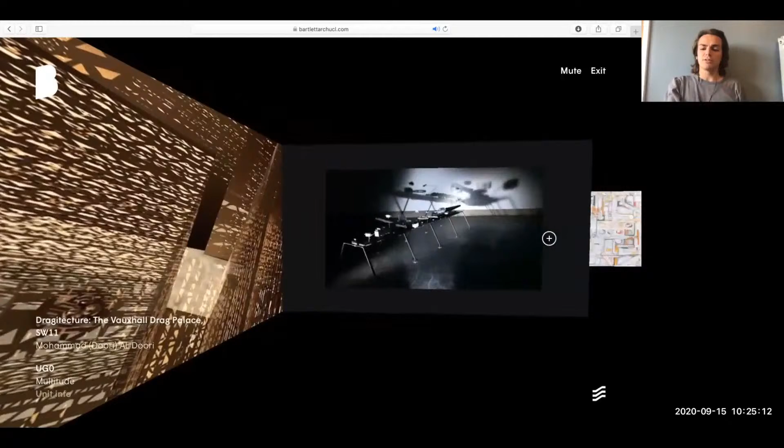I'm going to start with UG0 because it's the lowest number. UG0 is one of the older units, having been around the Bartlett for, I think, a thousand years maybe. This year they've been looking at multitudes, rediscovering neglected space in London with a real social focus of architecture as a social condenser, and the multitudes that presents. There's some really fantastic work.

I'd like to start with this work by Temi, which addresses something really contemporary and relevant this year: Black British history, and how it's overlooked in a lot of our museums. A lot of our galleries are very whitewashed, and she's hoping to redress that balance in SE15 in Peckham, an area known as London's Little Lagos.

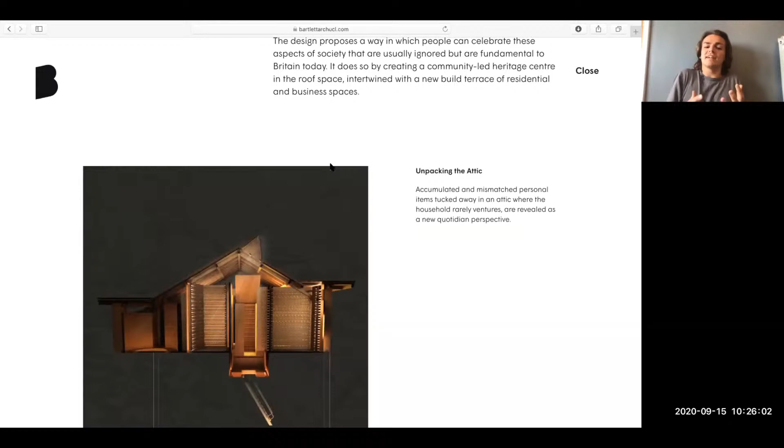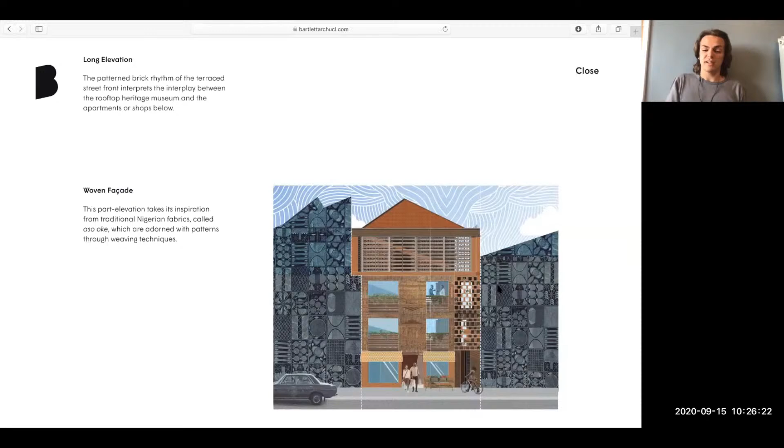She's thinking about the attic space, how in a house it becomes a sort of personal archive. That was her first project for the year, about the hoarding of things, memories and experiences that go on in people's attics, and how that interesting typology could be used to create, in London's Little Lagos, a community-led heritage centre to redress how Black British history is overlooked in a lot of our contemporary museums.

I just love these drawings. I think they're really fantastic and clear. It's immediately clear what we're talking about. The culture comes through these drawings, and I think they're just fantastic. It's a really lovely project.

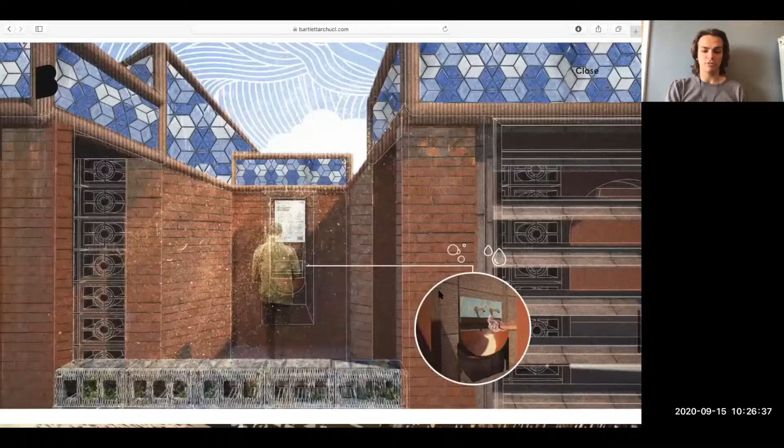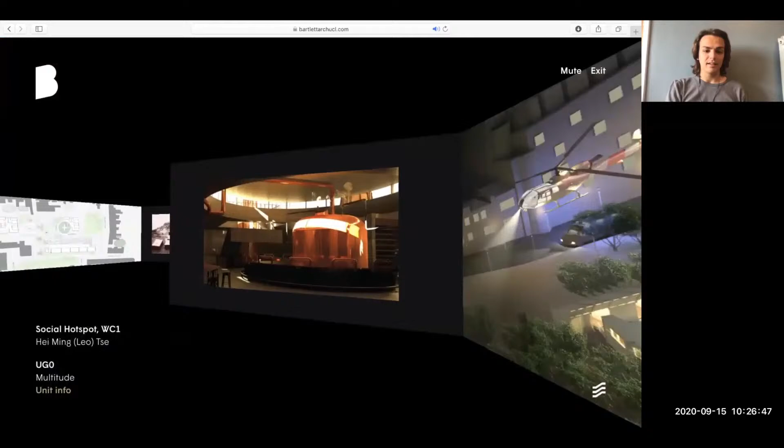Next, I'd like to look at Peter's work. His project, Recasting Holloway, is based at Holloway Women's Prison. He's read the Baroness Corston 2007 report, which looked into different ways of rehabilitating women who've committed crimes, and the shortcomings of our women's prison system. There are some really interesting facts in here that I had no idea about.

Women spend an average of 3 months served in prison, and that means their houses and their lives get destroyed and taken away from them. Then they only have 3 months before they're spat back out into the world with nothing again, such short sentences that quite often they don't even reach the rehabilitative programs available to men in prison.

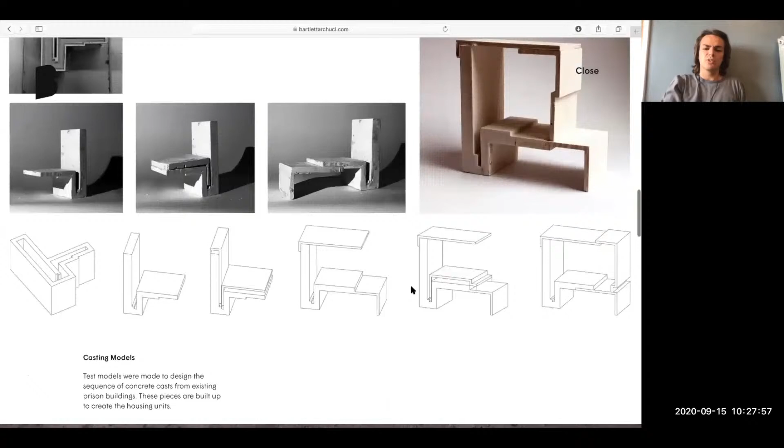He's thinking about how you can take hold of the former women's prison site in Holloway, which was sold off by Mr. Bean lookalike runner-up George Osborne, and is being turned into a very conventional housing development. He's thinking about keeping it as a site which could help serve as part of the penal system in a different way to how the women's prison did.

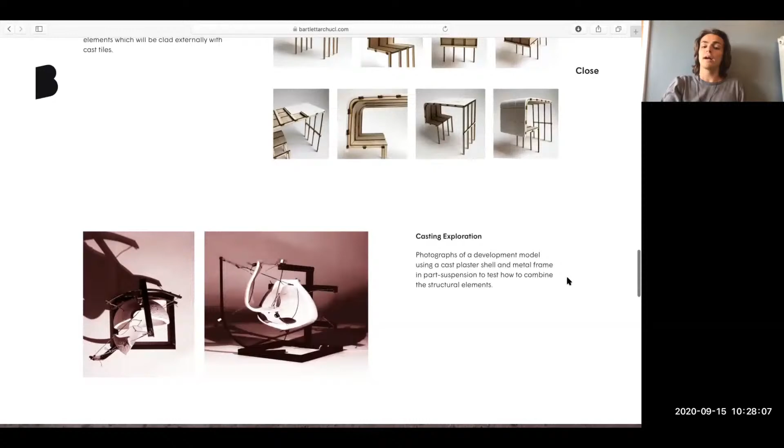As you can see, he's developed his ideas through model making. It's resulted in this really lovely, really clear model where you've got this mixture of social housing and rehabilitative facilities for these women, so they can come out of whatever situation drove them to crime and be safe in this safe space.

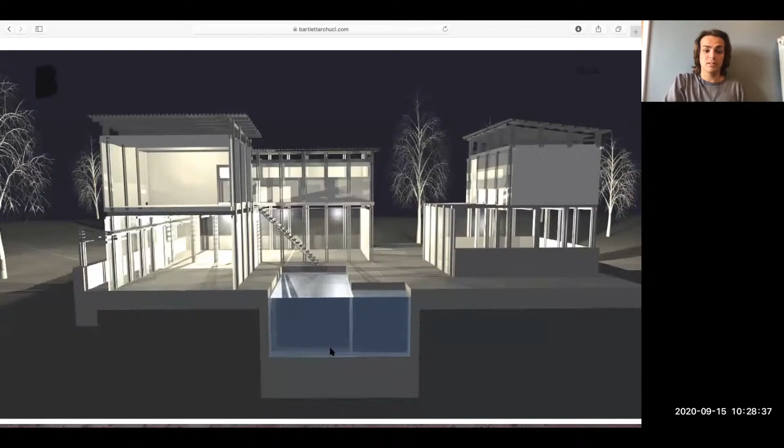I think it's a really fantastic project that addresses an issue that's maybe not talked about so much. We don't talk about women's prisons so much in this country, and I think Peter's tackled it in a really clever way.

Next up, I'd like to look at Andre Dinu's work, which is a social housing project down in Elephant and Castle — not Elephant and Castle, really, it's down in Walworth, where the Heygate estate used to be.

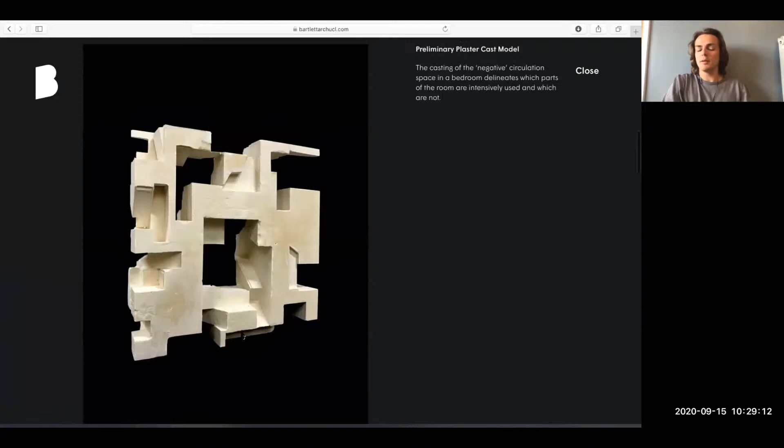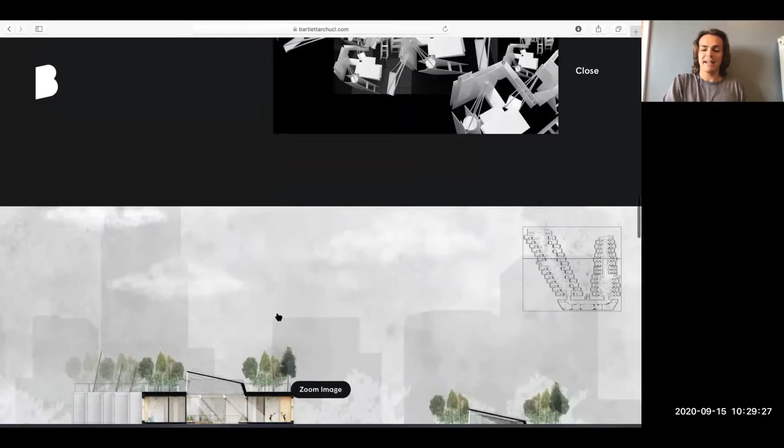I've made fun of George Osborne, I'll make fun of Labour and the Lib Dems now. The Labour and Liberal Democrat council back in 2004 sent out a survey to residents of the Heygate estate asking if they'd like improvements to their kitchen, and obviously they said yes. They took that survey and used it as an excuse to demolish this estate and destroy this community, scattering it across London. What was 1,214 social houses has been replaced by 82 social houses and swathes of Ministry of Sound adjacent private student halls, and very exclusive, not community-focused design that's tearing Walworth away from Walworth and bringing it more towards central London living.

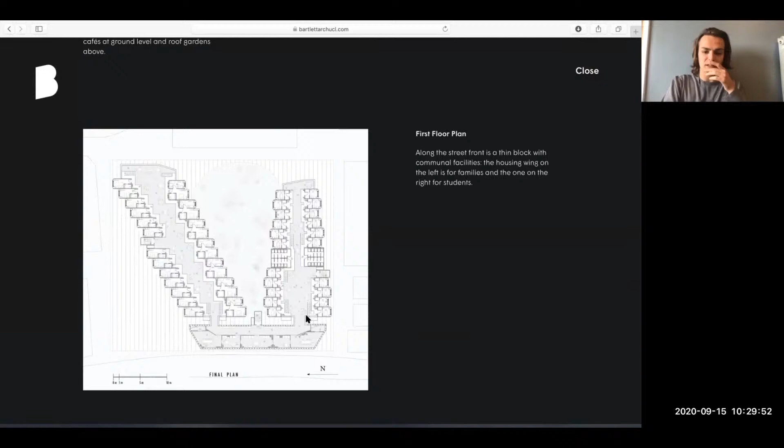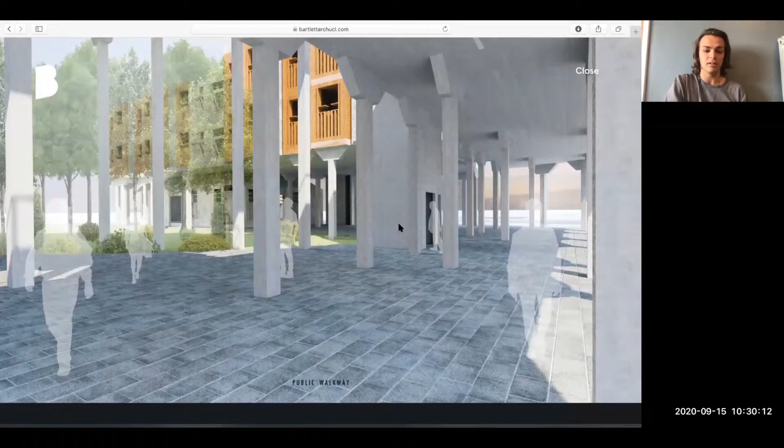What Andre's done is designed a really nice combined social housing and student housing development. I think this plan is quite nice, quite lovely, quite clear, and tackled a really important issue. I think the destruction of the Heygate estate was one of the greatest mistakes in London planning, done in the worst way it could possibly have been done. She's just working to redress that balance. I think it's a really great place to start a project.

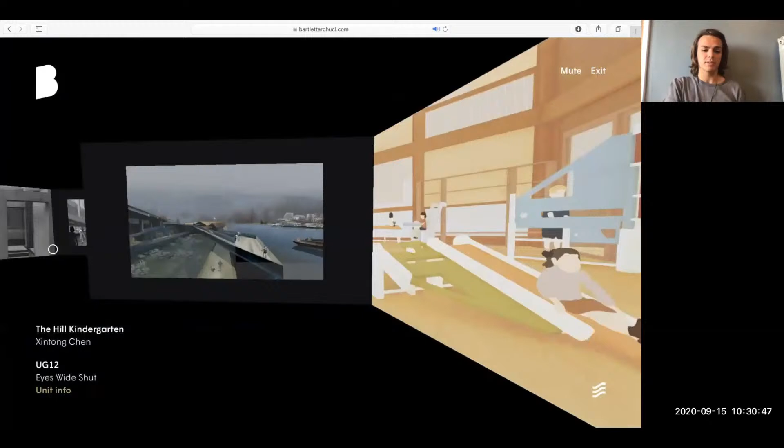I will go all the way up to the other end now, to Unit 12. Unit 12 started the year designing with their eyes wide shut to Prague, going there without any knowledge, with just their preconceptions. Then in the second half of the year, they turned that around on its head and designed very socially aware, very contextually aware buildings for Prague, as much as they possibly could. So it took completely the opposite approach, and it's come out with some really interesting buildings.

I want to start with Kirsty's work, because there's a different kind of accessibility, I suppose, for potential prospective students, or students coming from first year to second year at the Bartlett. I think the Bartlett can seem like a bit of a CAD and render farm, and this is just a really nice example of some hand-drawn work that I think is really superbly clear.

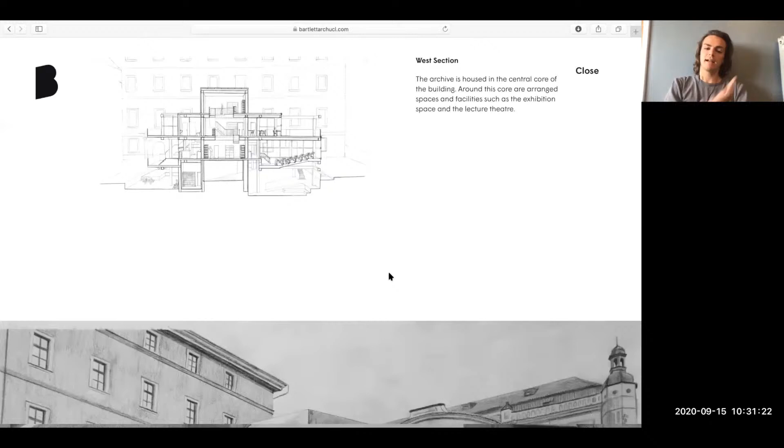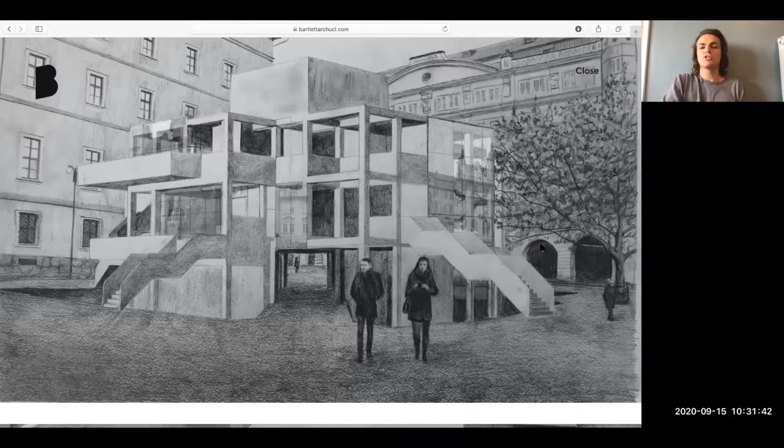She's designing an archive library for samizdat literature, which was banned by the communist regime in Czechoslovakia, and is now held in this archive. But the archive does struggle to get government funding, it's just in this other building — it's not really on show as perhaps it should be. She's designed this really nice looking centre to showcase this part of Czechoslovakian history there in the modern day city of Prague.

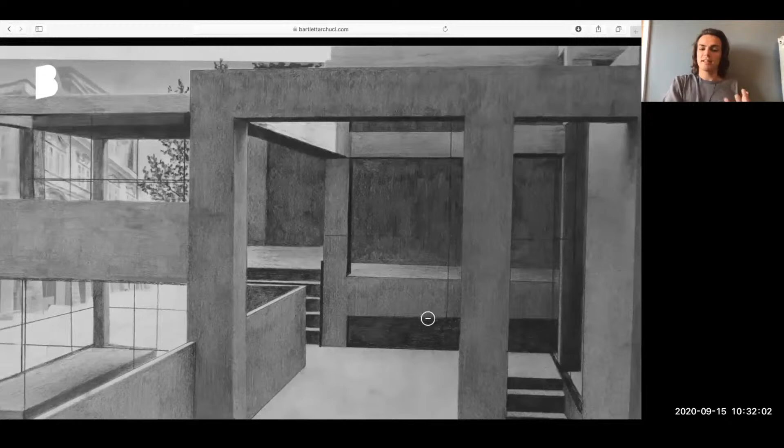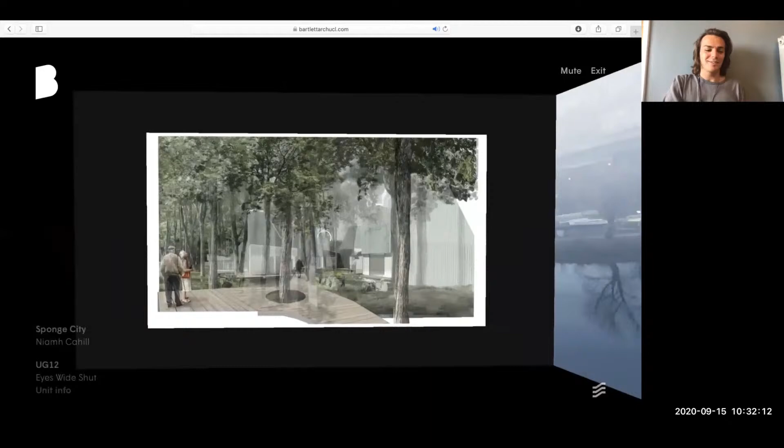Oh, I love that zoom, it goes right the way across. To Niamh's work, Sponge City, which tackles the Czech Republic, and specifically Prague, having an aging population.

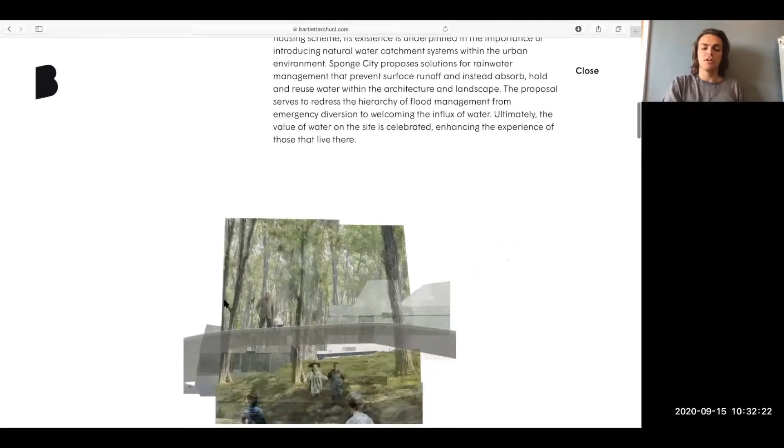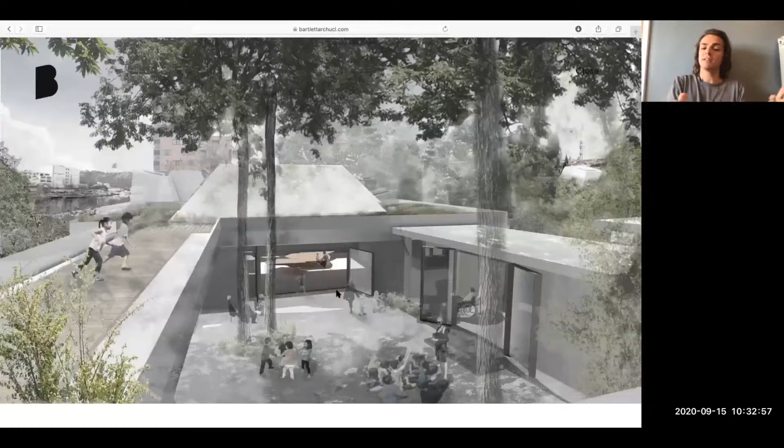And it's really smart, it seems so obvious, but it didn't occur to me until I read into it. To tackle an aging population, you have to house the elderly, but you also need to encourage people to have more children. She's provided that with a kindergarten in the same space as a home for elderly residents. By providing that, people are more likely to have children if there's a place for them to be cared for while they're at work. It just makes perfect sense. I think these renders are really great, you can immediately tell here's children, here's old people. The idea of that cohesion comes across perfectly, but it's this plan that I'm just in love with.

This is super gorgeous, I think. I love the occupation in it. I think it doesn't look too busy, it looks sort of perfect, but every little detail is so perfectly clear, just from a plan as well. I think it's really fantastic.

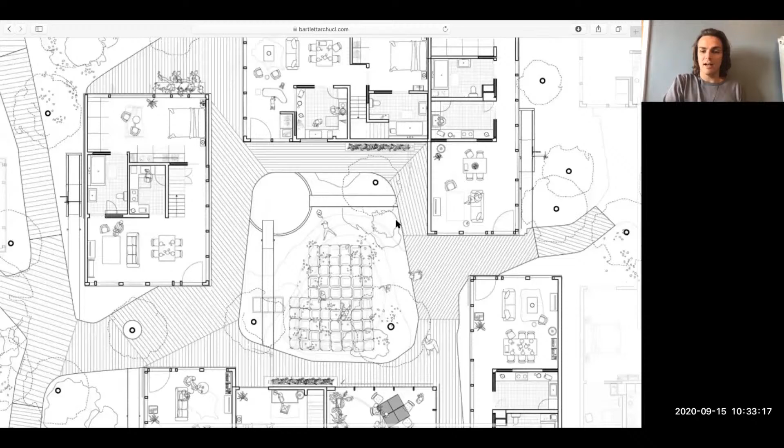I would absolutely encourage you to come and look at this project in more detail in your own time. I think it's really fantastic.

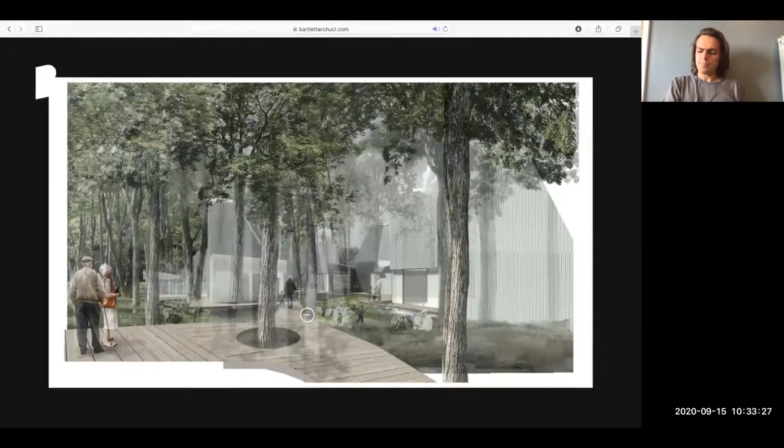Moving along again to Unit 10 - there's no 11, so we're straight to 10. Jackdaw Dream. Jackdaw Dream, I didn't know this.

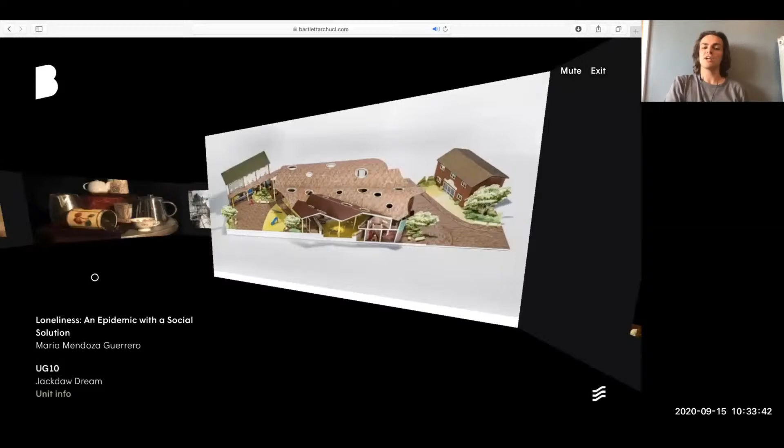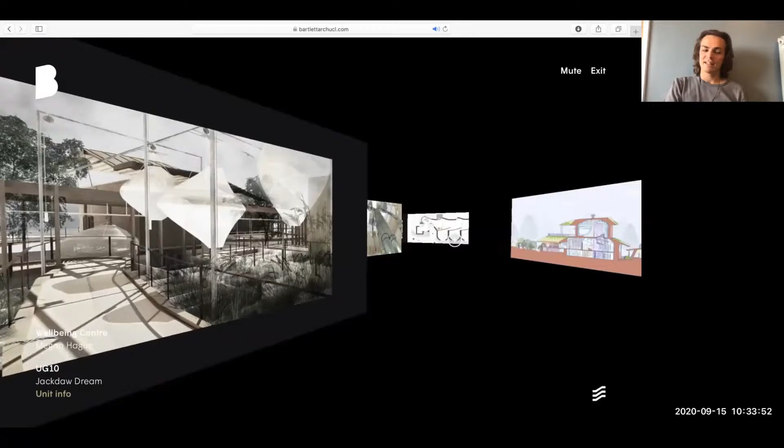Jackdaw Dream is an H.G. Wells quote which describes the home as a jackdaw's dream, i.e. just full of clutter and crap and the things we collect along the way. I think that's a really fantastic analogy. It's something they've used to appropriate not making social housing, not making housing units, but making homes. What makes something a home instead of a house? It's that social aspect, that community.

So they've gone and worked with real people in South London. Again, this is Megan's project. This is in Sydenham, a place where you pronounce all of the consonants and none of the vowels. And they've actually created these projects with real people instead of just speaking to other architects. They've gone out of the bubble, and I think that's really fantastic.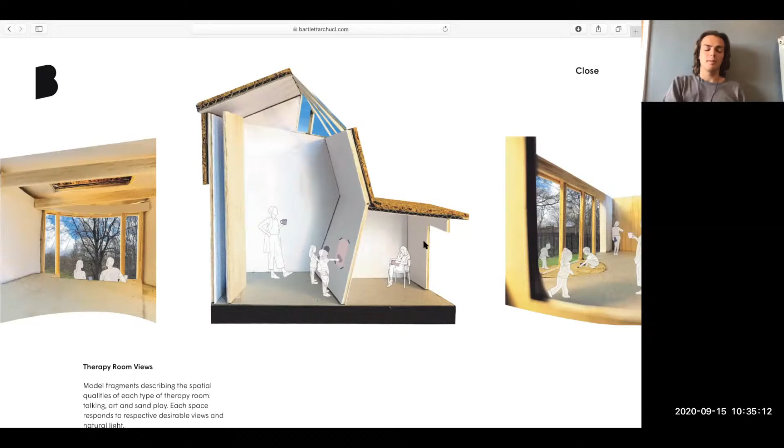Throughout the units it's produced some really fantastic results. You can actually see the quotes that people have said about the building - I think it's fab. Hers is a wellbeing centre, tackling the mental health problem in this country - we've got a huge funding and resource deficit for mental health here. I think this is a great way of using models. It feels like clarity and accessibility were really at the forefront of her mind, at the top of her agenda. Just comping these models into the context and putting these people in, it becomes so much immediately clearer what she's talking about. I think it's really fantastic.

And again, lovely clear drawings, and it's really nice to see exactly throughout the unit how real people's actual opinions have come to form the basis of these projects.

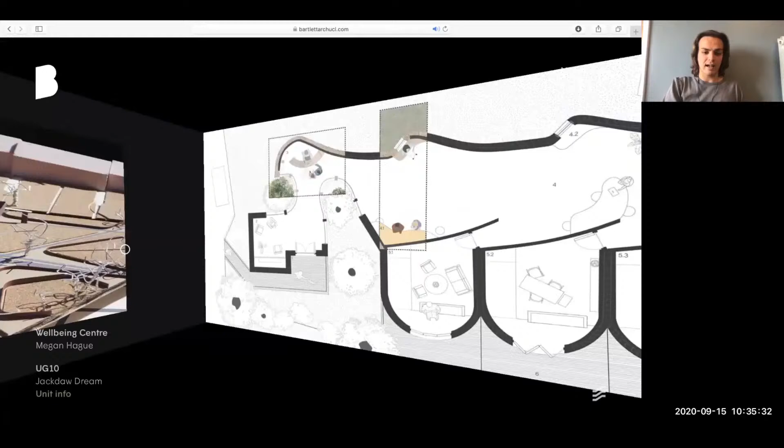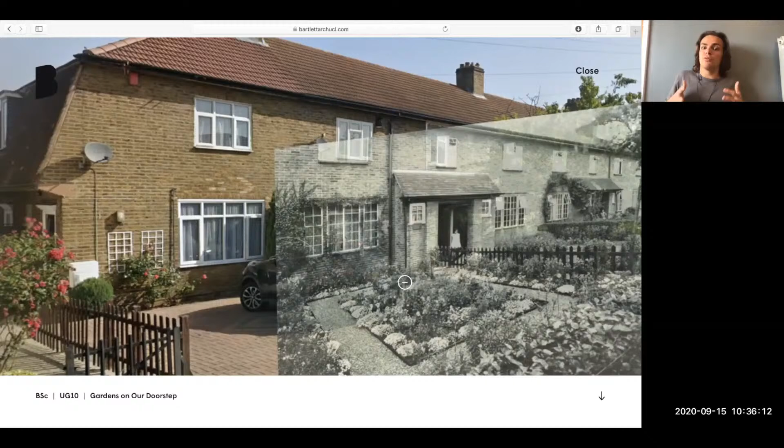In doing so, the homes that were once homes have become a little bit more houses. They've lost that sense of community - people don't talk over the fence, people don't have a part of themselves on show for the community, for the people walking past. And he's trying to redress that, in - I don't know where this is - South London again.

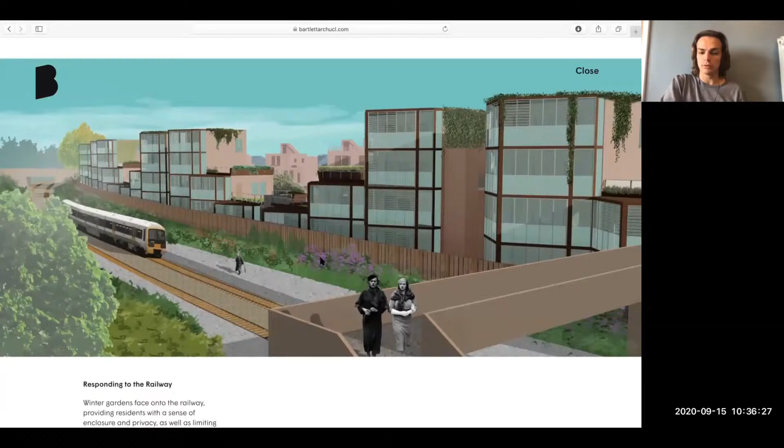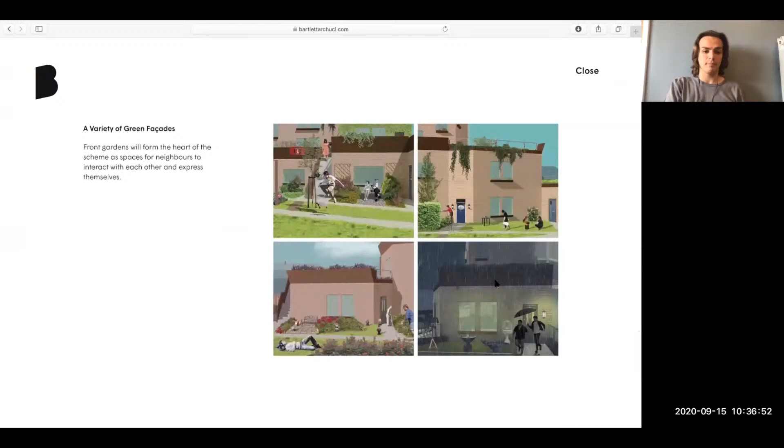And these are all shown with renders here at the show. I think they're very nice, very stylized, quite tactile feeling renders. But again, it's just eminently clear what he's talking about, especially in this - I think it's a lovely, lovely image. We can just see exactly what they mean: people have front gardens and hence they spend time in them, and then you see your neighbours, and it's about having that sense of community in the housing that you design. I really love these, they're just very, very nicely done.

That is it for Unit 10. I'd like to go next all the way down to Unit 6. Unit 10 and 6 are both new units this year.

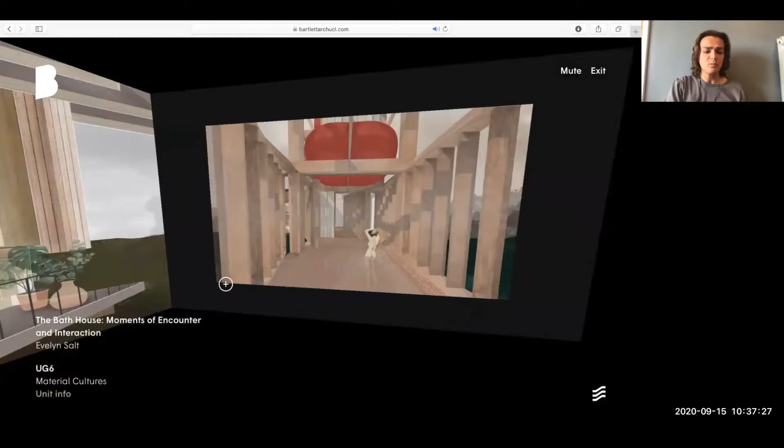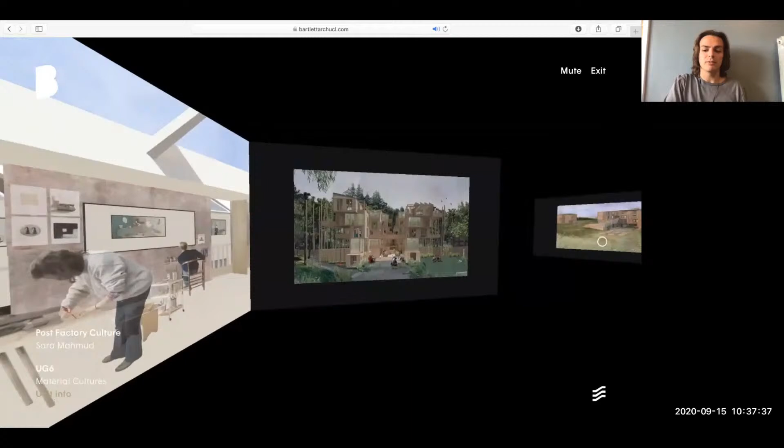I'm just going to let this play because I love it. Unit 6 is thinking about how we do building and what materials we use. Obviously, we are at the Bartlett, everyone signed the Architecture Students Declare. We're all a lot more environmentally conscious than we were even this time last year, which sounds ridiculous. It feels like we've come such a long way in a year with something we've known about for so long, but finally it feels like something is being galvanized.

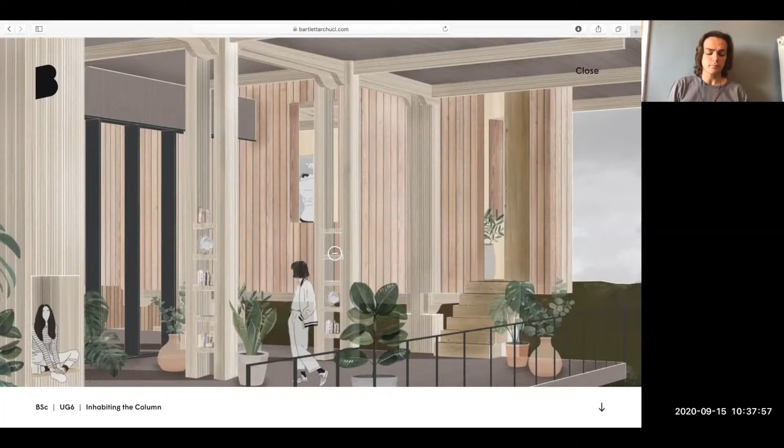So they've taken that environmental ethos and gone to work more collaboratively in a way that's not often done in Bartlett units, particularly at undergrad, working with real housing groups, real designers in Buckinghamshire, in Aylesbury. They've worked on a group master plan for the Aylesbury Garden Town, a government initiative bringing back this new wave of new towns that's petered out a little bit now. This is Maria's work, and she's talking about creating a solution for a housing typology which can be used again and again, as opposed to a specific context.

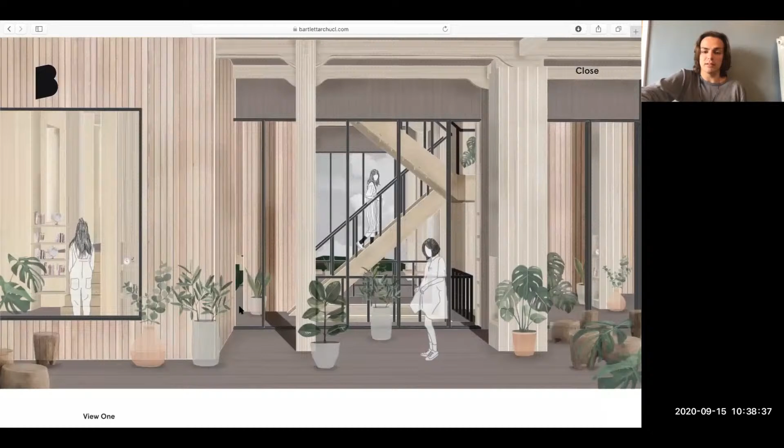It's a little bit more general, but tackles a very specific problem worldwide in terms of the environmental impact of building, how to build environmentally, and how to build on a mass scale, how to build all the new houses you'd need in a garden city development. You'd need a lot of houses again and again, but without it being that monotonous Barratt, Keepmoat, Taylor Wimpey style thing where everything is the same and everyone lives in the same space. So she developed these flexible spaces.

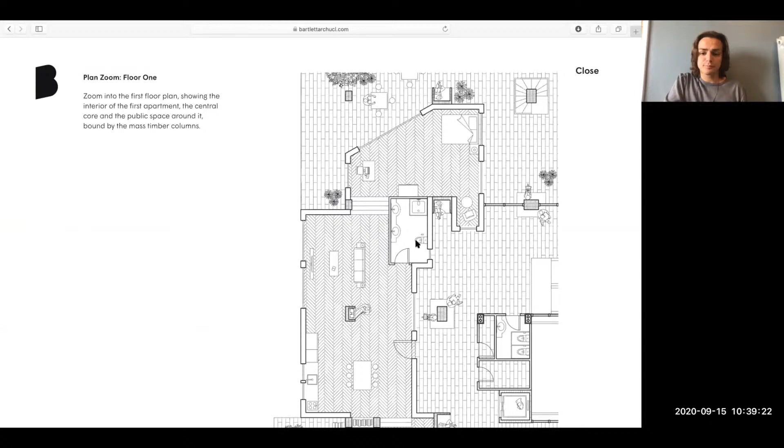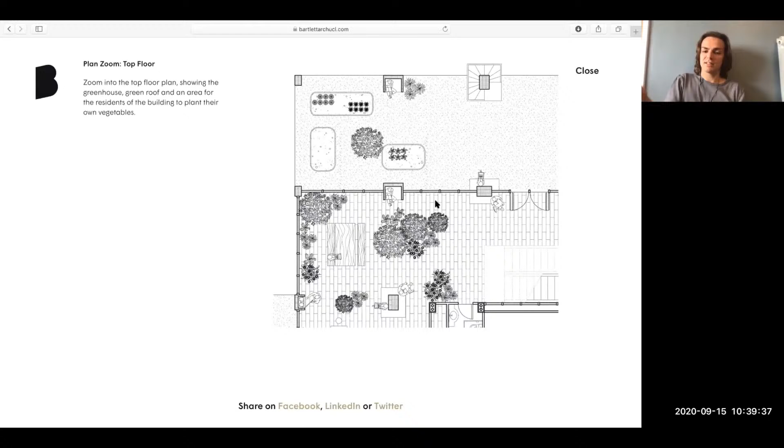I think these renders are really lovely. You see a lot of the authorship come through. It's very stylized, but so clear and accessible. I don't think it's confusing in any way, it's so straightforward. But it's these plans that I am absolutely in love with. Very nice, very clearly annotated, but then these zooms in, I think they're just fantastic. They're really clear, you get an idea of the occupation. It doesn't look too busy, but all the details are there. Everything you could need to know is there. And you get a nice sense of the materials from a plan, which is so rare, to get such a great overview in the plan. I think these are really, really lovely.

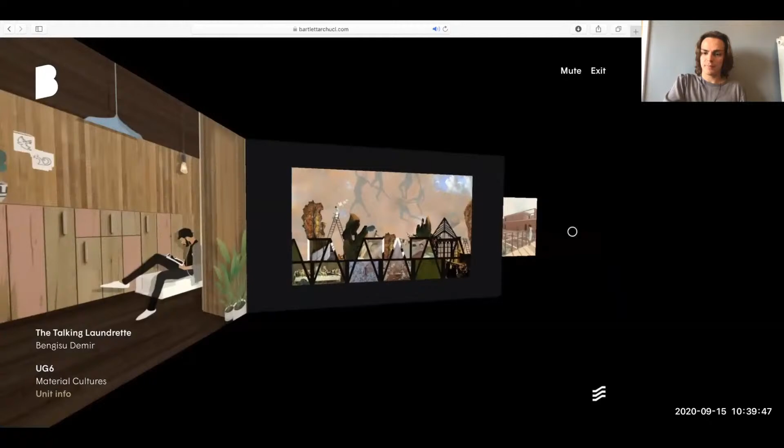Also in Unit 6, I always struggle to find this one. Somewhere down the back here, yes, Sarah's work. Sarah was thinking about something else the unit tackled en masse: post-factory culture, and bringing where things are made and what we make closer to home. It's something we talked about a lot, kind of 10 years ago, air miles and anchor butter being a very bad thing. That's from my childhood I think, but it's being brought up again here because it's so important. We ship things from across the world. What if we didn't? What if where you worked and where things were produced were next to the homes you used them in? It makes complete sense.

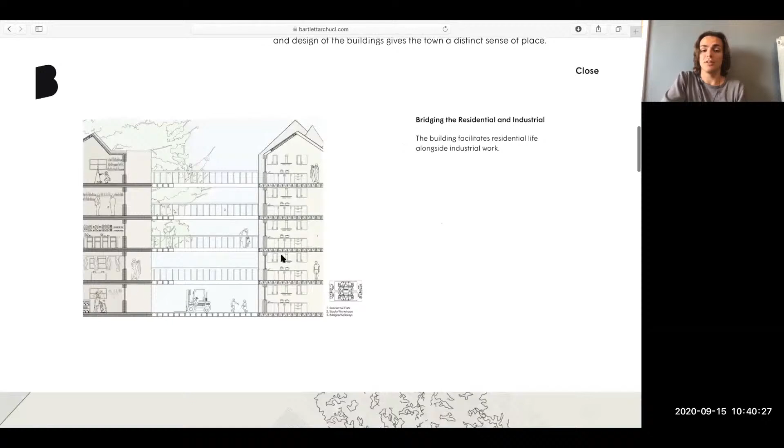It's a different way, as opposed to tackling the environmental crisis from an architect's perspective by building in a conscientious way. It's also about what architects can do in the planning, in the brief stage, to help reduce our carbon footprint and be more environmentally conscious, be better at that sort of thing.

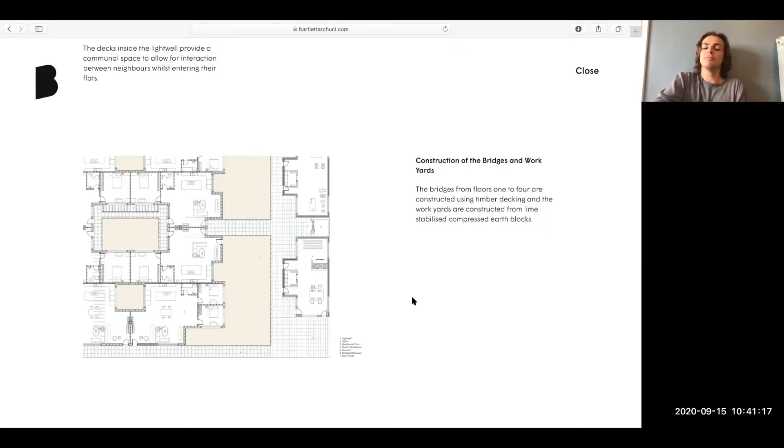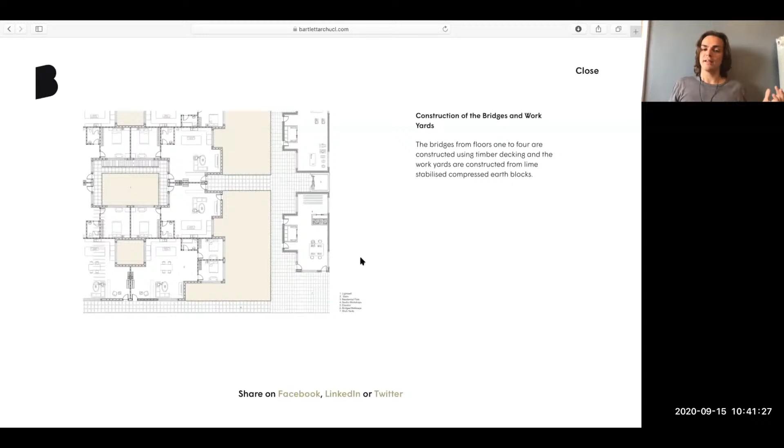And again, I think these plans are just lovely, lovely renders. But I think it's the kernel of the idea here that's really fantastic, bringing together affordable housing for makers, people who would otherwise struggle to get into the creative and design professions, because let's face it, it's a tough racket for your first 5 years in design. You might not make any money. You need somewhere to live that's affordable. And she provides that while also bridging the gap between where things are made and where the people who use them live. I think it's really fantastic.

And now, saving the best to last, I would like to go to Scotland. My own unit, my Unit 1. We've been based in Glasgow this year, which is where the inspiration for this tour comes from.

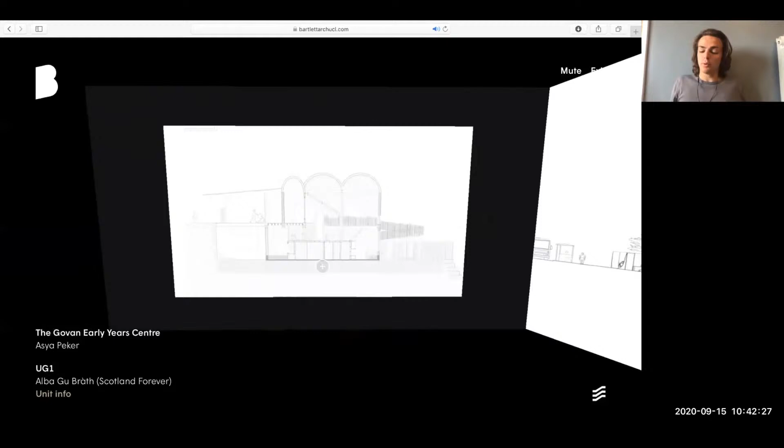Glasgow as a city has been prescribed architecture quite often. It was prescribed quite radical, by comparison, modernism, big tower blocks, a huge inner city motorway, and new towns en masse, against the will of the people who actually had to live with them. Architects imposed their will on them, and so did governments. It was the city in the UK with the highest proportion of social housing of any city. And since Thatcher, that has absolutely nosedived. Now it's a shrinking city as well. Since the 80s, the ports and docks that had made Glasgow thrive have all disappeared.

And the city is shrinking. So we were thinking about what is the role of an architect in a city which is shrinking, as opposed to a place which is expanding.

Quite a lot of architecture focuses on making anew, but what can architects do to help social needs in a city where there's more land and less buildings and less people, taking a global view of that as well, thinking about global issues like the environment and social problems that affect us on a global scale and require a global solution. And what role can architects play in that?

I'm starting with Asya's work here, which is based off of the SNP's promise of 30 hours of free childcare a week for every child aged 3 and 4 in Scotland.

And that is a promise that has been slightly hampered by the social divisions in Scotland. So in a place like Morningside or Kelvinside, the very wealthy areas of Glasgow and Edinburgh, there's no problem finding that 30 hours of free childcare. But in the places where people need it most, where there's most single parent families, where there's most families where 2 parents work and they need that childcare to go and earn a living, that childcare is harder to come by because there's fewer hours and the nurseries are overstretched.

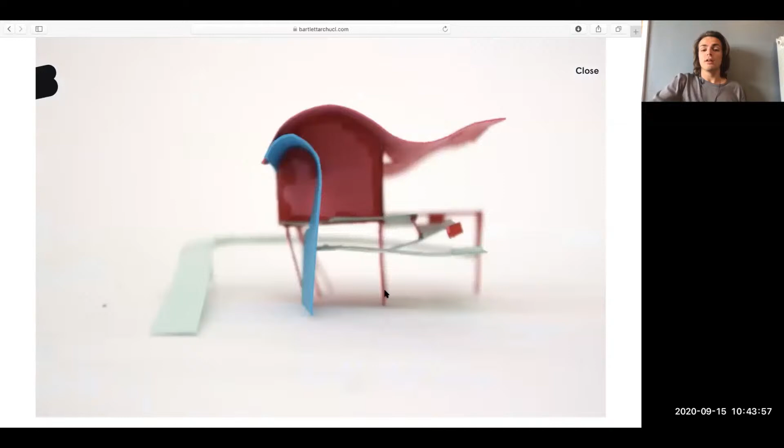So Asya has taken that very particular problem in the area of Govan in South Glasgow, which was a former dockyard area, and tried to address that quite simply by creating a nursery space to provide this childcare.

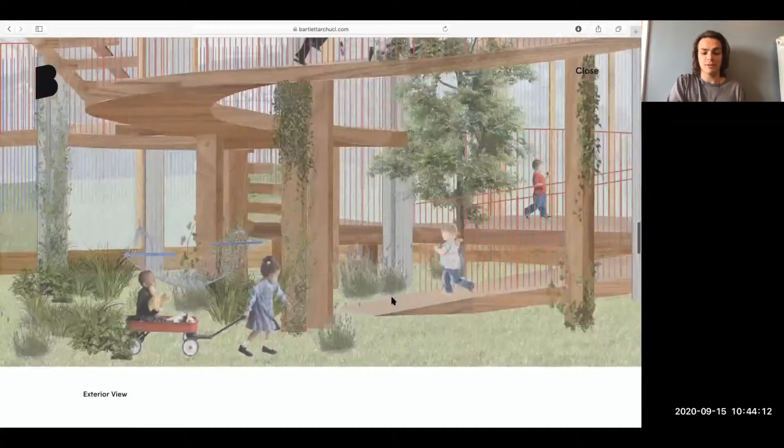And her renders are really lovely. I really do like them a lot. Very child focused. It makes perfect sense, but I think they're absolutely gorgeous. Again, super clear. Just all you need to see is children playing and you understand exactly what this project is about. Again, lovely plans.

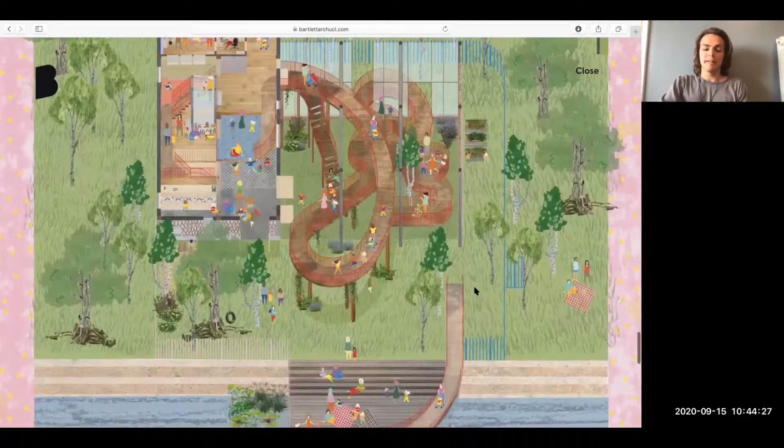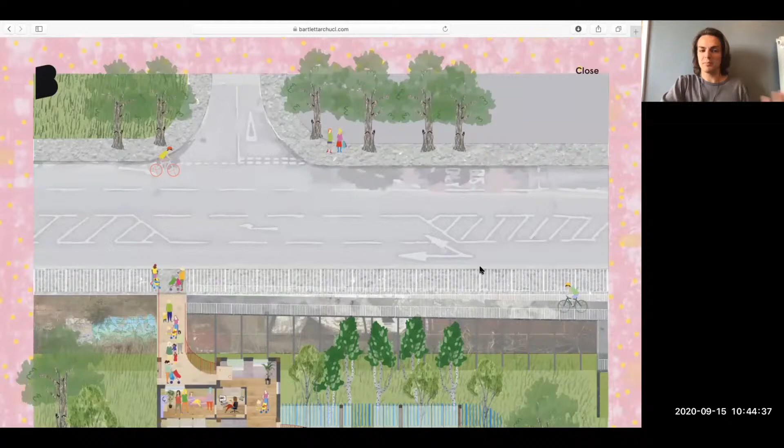And this axo is just my favourite thing. I think it's gorgeous and really appropriate, and takes in so much of the social context and things which would have previously in Glasgow design been ignored, and the will of the people in Glasgow would have been ignored. And Asya worked with the local people's opinions to create a really wonderful scheme.

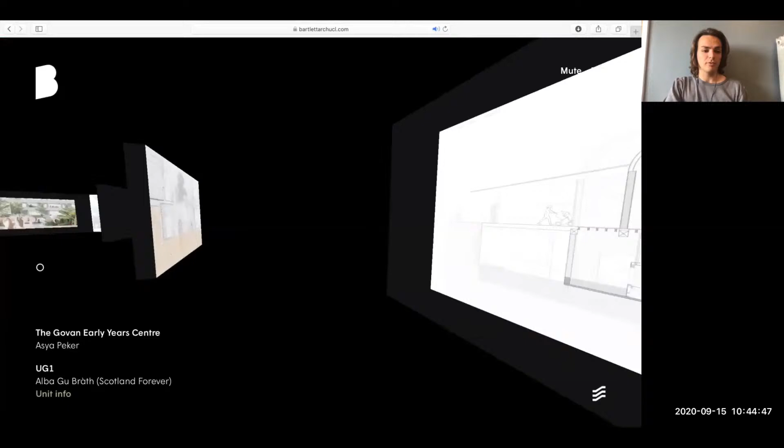In Glasgow, here it is, 51% of households with dependent children are overcrowded. There's a massive amount of single parent families in this area of Glasgow. There's a real need for a rethink of how childcare is provided, hence the SNP's promise, that's where that comes from.

But as well, what role can architects play? The tenements, which Glasgow is famous for, don't necessarily provide children with the outdoor space. Quite a lot of the courtyards which they used to have have been turned into parking or turned into bin stores, and they are no longer a space for children to play safely. And in a place in a city where there's lots of single parent families, children quite often outnumber the adults in their households. Why are we still designing housing with adults at the forefront and children as an afterthought?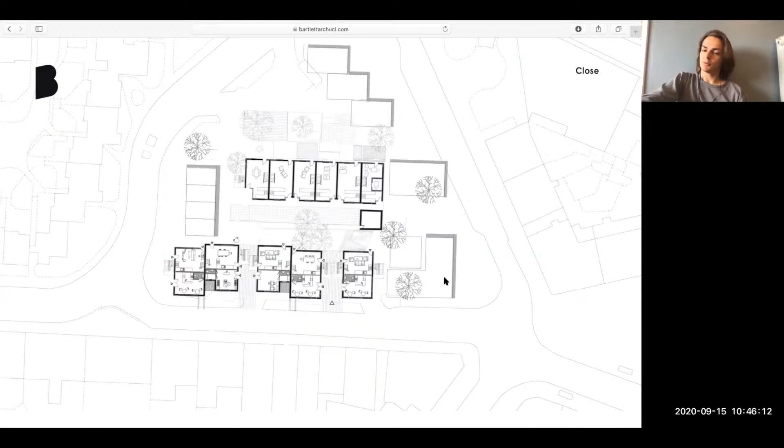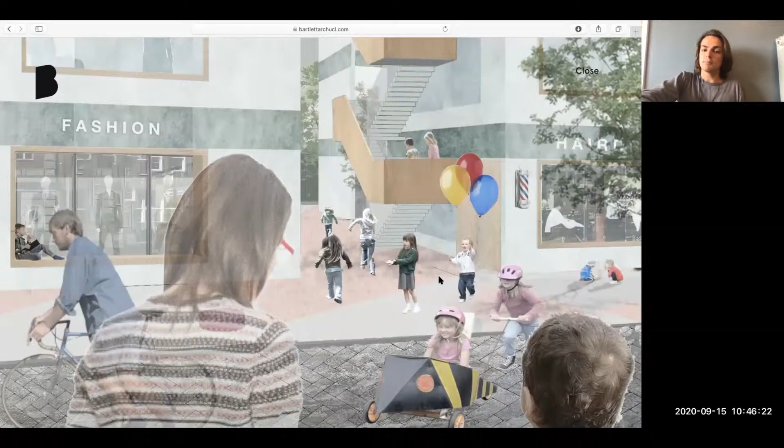And Mabel's flipped that on its head and thought about designing housing with children at its centre, both thematically and literally, children at the centre in this courtyard being able to play. Again, I think it's really clear, these drawings are accessible, and it's a really great social project, a great bit of social engineering, I suppose, just to flip that on its head. It's quite a simple thought, but it's something that's not been done before, and she's used it to really great effect here.

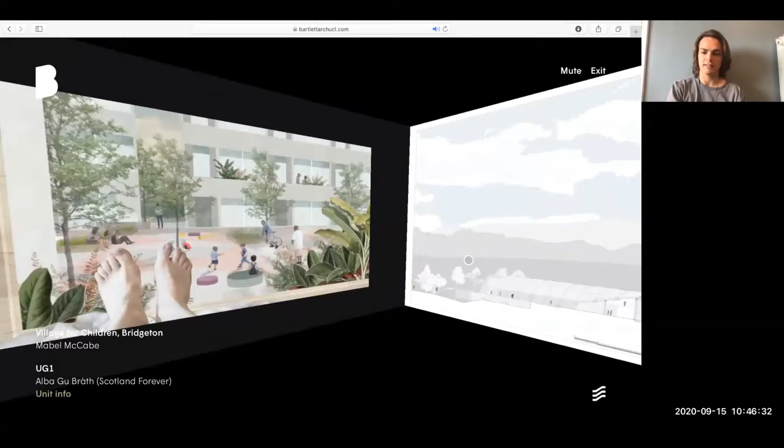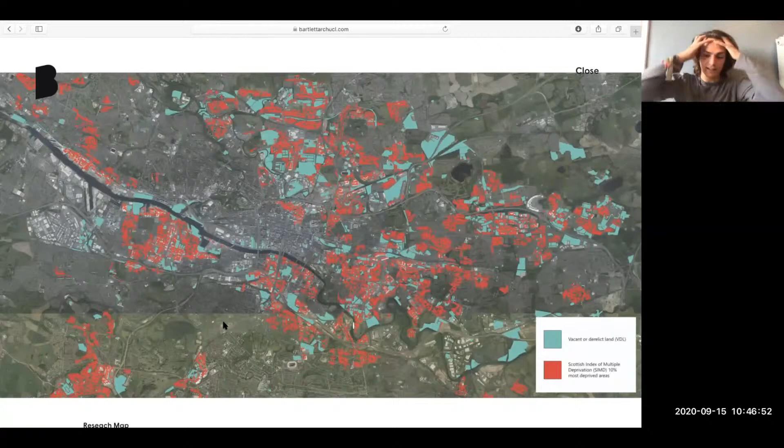I think this is just the most fantastic map of derelict land in teal here, with the Scottish Index of Multiple Deprivation, 10% of most deprived areas in Scotland. And you can see the correlation. It's the places which have got derelict land left over from where they formerly had really strong industries, and now the people who are left living there, there's no jobs there anymore.

There's swathes and swathes of derelict land, and that has created this sort of immovable social division. The very densely packed places still have shops and places to work, whereas the people are left stuck in these areas with no jobs and no facilities anymore.

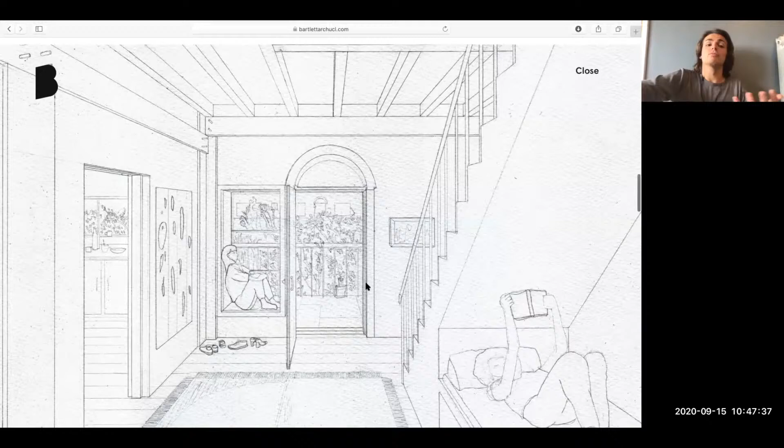Mitch is trying to redress that as well, trying to turn back the clocks in terms of Glasgow's social housing, and make the proportion of social housing available in Glasgow more reflective of what's needed, because as everywhere else in the country, there's far less housing than there are people who need it.

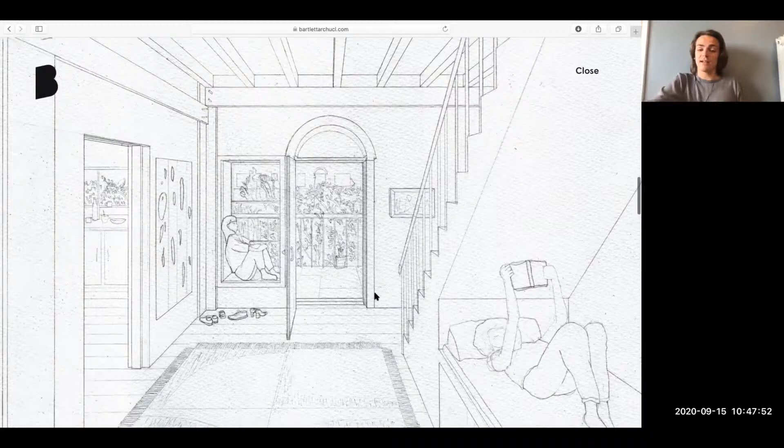So he's using Landressy Gardens as a sort of blueprint for how this could work on other infill sites, using old, proper good standards of size, proper nice spacious social houses in infill sites in Glasgow.

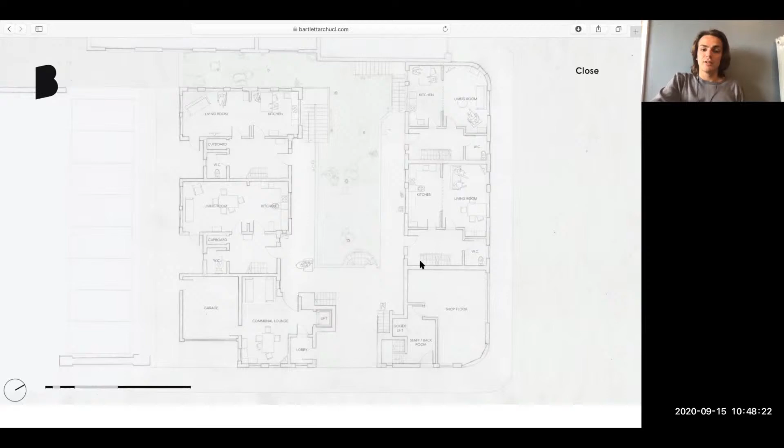And again, another hand-drawn project that I think is really lovely. This occupation, again, it's so clear, it's so straightforward, not complicated. I think it's really well executed and well shown, and I love these drawings - a fantastic project, again tackling a really

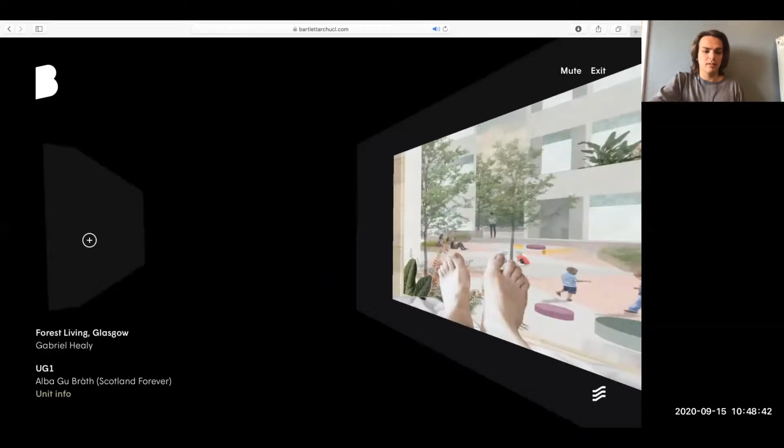prescient issue in Glasgow. And then I would like to end with, all the way back at the start here, another social housing project on the same set of streets in Bridgeton, Landressy Gardens by Rory, which responds to exactly the same brief as Mitch, almost - it's about creating a sort of social cohesion.

These people in Bridgeton used to - the society, the community in Bridgeton came out of people going to work together. People worked together in the same industries, and now the industries have gone. The community's going with it, and there's a generational change happening.

The people who were working in these factories in the 60s, 70s are now dying, and there's new people coming in, but there's nothing to bring that community together. So Rory's thinking about social housing, which can be a way to foster a community.

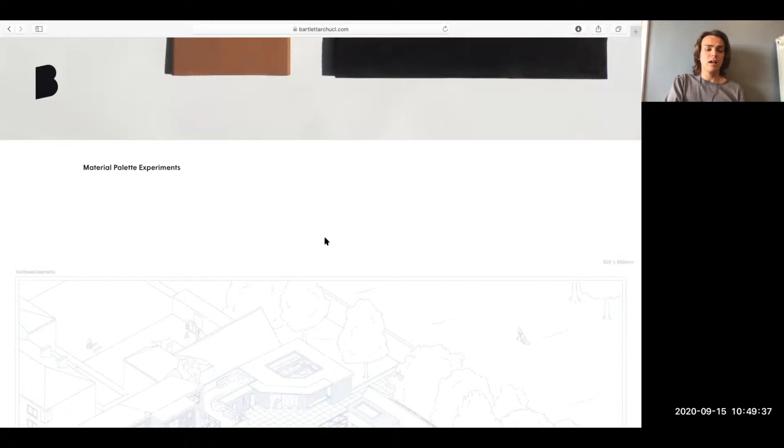He's built in different ways to customize your house, different modules, things that can slot in and out, and how that means the community, the people who live there, can affect change and make this their own, and means they meet people as well. They meet each other working on these projects together.

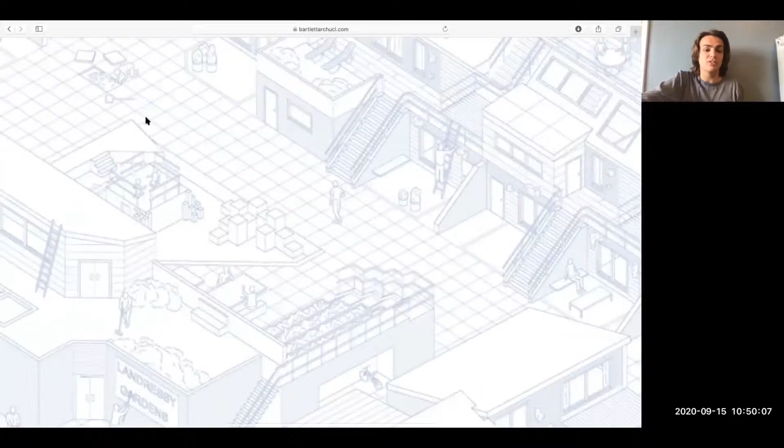I think this ISO is just the best drawing of it possible. It's absolutely fantastic. You can see these people from the houses coming down to work in the equivalent of their own garden, all of them working together on different things and creating this sort of community spirit by doing and by renovating their own properties.

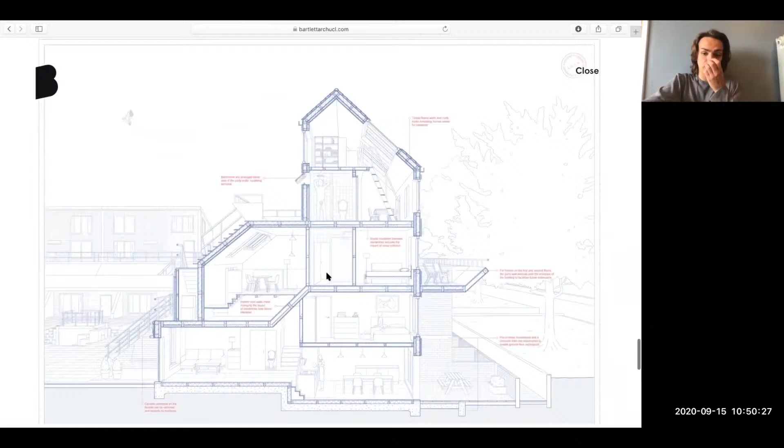I think it's really a fantastic idea, but fantastically drawn as well, super clear. I think it's a really great section, but it's this ISO that I'm going to end on because I really like it. I think it's a fantastic example of architecture that works for the community, and a drawing that is just so clear and so straightforward.

It doesn't take any abstractions. It's clearly intended for the people who would actually live here, as opposed to a drawing that would be intended to impress other architects and just be talked about endlessly in crits and in school.

It feels like something that you could actually go and take to a planning meeting and show to people, and they would understand what you meant, and that's the way to get people on board - by actually communicating with people.

I think what all of these projects are talking about maybe is a thought about not addressing ourselves to other architects so much, which I feel is something that maybe the Bartlett has a bit of a reputation for. But I just wanted to show projects today that were different from that.

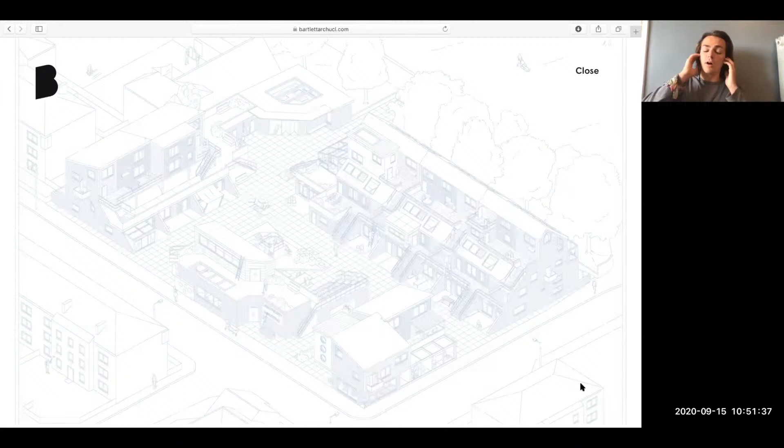Maybe that reputation is changing slightly, and you can succeed on the BSc and produce fantastic work like this, which is clearly very beautiful as well, but doesn't need to take an architect's perspective - it can take a community perspective, both in its brief and in its presentation.